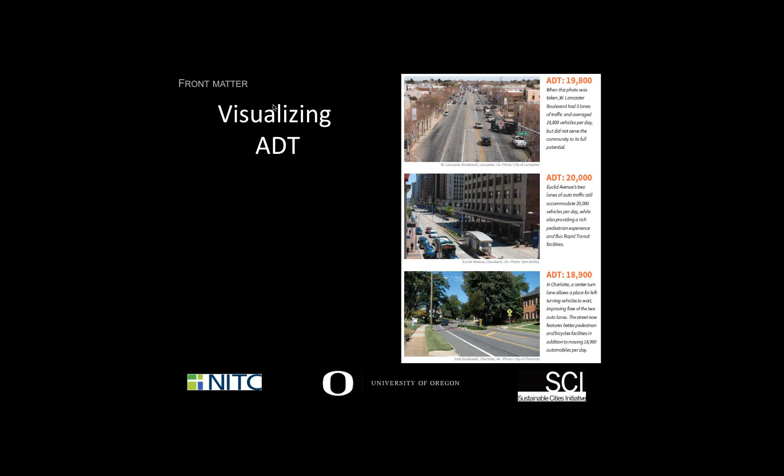So the idea here is you can have an open conversation in the community: here's the level of traffic, here's some different designs that can handle that level of traffic, what looks best? Rather than a fight of yes or no, here's a range of things that might happen—what do we want in our community? What do people think?

We introduce the idea, or highlight the difference between a speed limit versus a design speed—different ways to think about how we get certain behavior from vehicles on our streets. This is information every traffic engineer already knows, because streets are designed to a certain speed limit on purpose.

In fact, they're designed at a certain level, and then we post the streets with a lower speed limit, which is a little bit crazy, honestly, because if we've designed a street for a certain speed for comfort traveling at that speed, our natural tendency as motorists would be to go that speed because that's what it's been designed for. So we introduced this idea of designing a street to get the speed you want, rather than posting a speed limit sign to get it.

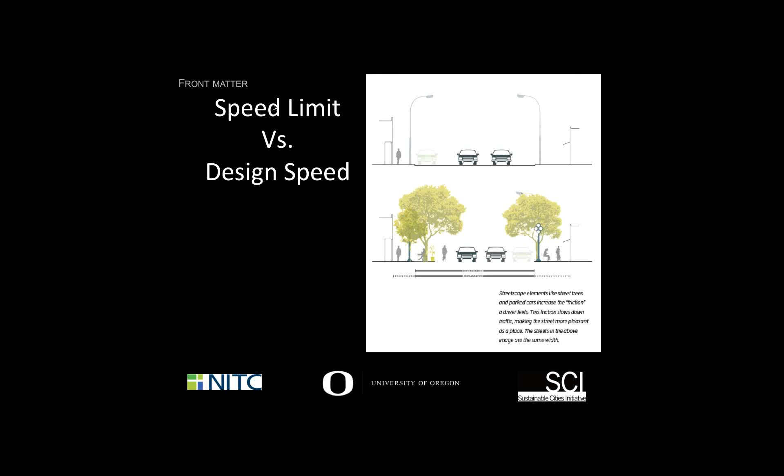And then we show some examples: here's three different streets, all with a 25 mile per hour posted speed, and three different designs. You can begin engaging more people in that conversation—which type of street do you think would actually get the behavior that you want? Rather than community members saying we need a speed limit sign to slow the traffic down, we can have this type of discussion in the communities.

Maybe a speed limit sign isn't really going to slow traffic down that much, because we've designed the street to go twice as fast as what you're asking for. If we really want motorists to drive slower, then maybe it's about how we design our street. So again, it's introducing vocabulary to a wider group of stakeholders so they can engage in these conversations appropriately—concepts that many people across city staff or local businesses might be very unfamiliar with, trying to engage everyone in that conversation in a productive way.

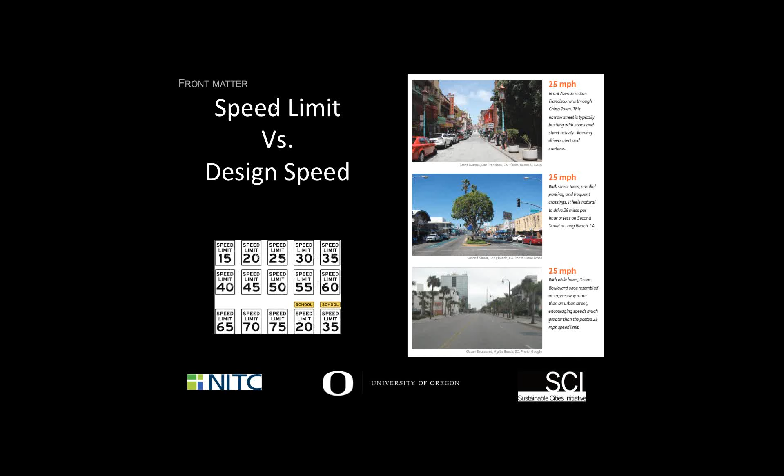We introduced the idea of the street cross-section, the different elements from the streetscape: curbs, parking, right-of-way, and gave a little bit of information about the costs of manipulating that right-of-way and cross-section.

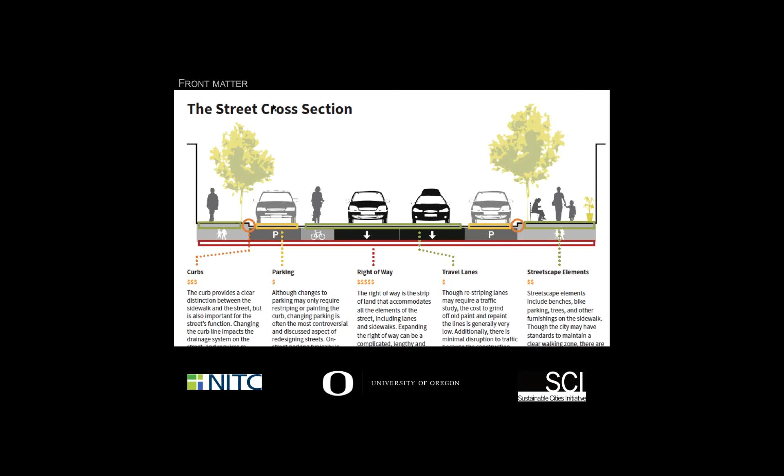Expanding a right-of-way is expensive versus restriping travel lanes, which financially doesn't cost a whole lot at all. Politically, maybe there's a different cost. We try to introduce this to help people have the conversation productively.

Each case study has a whole section with a series of common elements. Each case study is 4 pages, all organized in the same basic way. I'll get into the cases in just a moment. Every case has this engineering bar that you see here on the slide.

The type of street, what the right-of-way is, the length of the project we're talking about, what was the speed limit before the project and after the redesign, what was the average daily traffic before and after the project, and how long the process took.

Every case has that type of information, which is a standard bit of information to get people going. We worked with different traffic engineers to make sure this information would help add some seriousness to their paying attention to the rest of the material.

Each case also has a street cross-section before and after. In all the cases, the right-of-way remained the same, but what were the lane widths and lane allocations? If it went from 4 travel lanes to maybe 2 throughput lanes, a center turn lane, and 2 bike lanes, what were the widths before and after? What did the community have to play with in terms of space, and how did they deal with that?

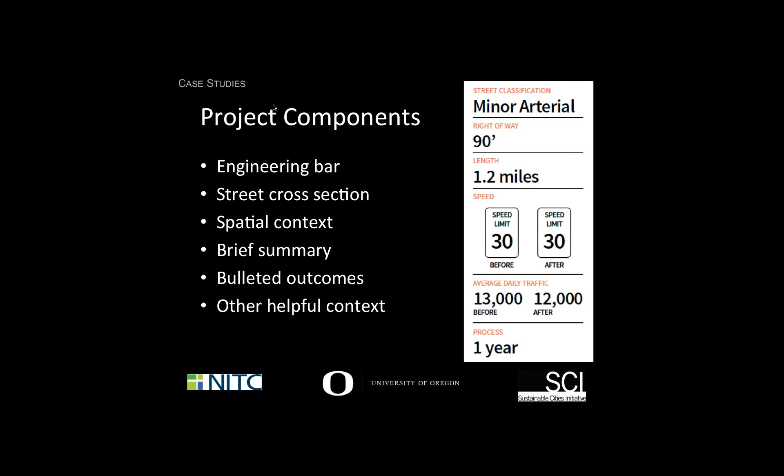That's the basic framing for each case. These next 2 slides lay out what each case study actually looks like - these are the 4 pages.

Every page starts with a before picture in the lower left and an after picture up top, so you can see the precondition and post-condition. There's a summary of the basic project, what happened, what did they do, and then the city, state, and city size is included, as well as the type of street we're dealing with.

So you can get a sense if you're trying to compare like-sized cities. Of course, it's not always a fair comparison - there aren't many cities around the country where the metro population is going to be 12.5 million people.

But when you think about a street like you see here on the screen, it's irrelevant that it's in the middle of a metro area of 12.5 million people, because this is actually a local commercial street to a local area. There are lessons here transferable to many parts of the country that aren't in the 12.5 million person, very sunny metropolitan area of Southern California.

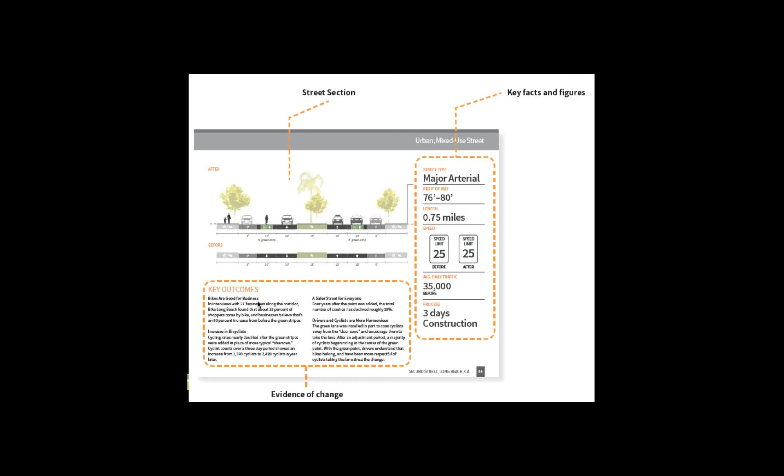The key outcomes, the successes or unintended consequences, are listed here in very short, brief ways to communicate what happened. This is really important for busy people who don't have a lot of time but are important in moving street projects forward in your community.

The third page includes additional context of the street. We do this figure ground mapping to show the building mass, how dense or urban or low density it is - the urban form of the space - which is particularly useful to planners, may not be as easily read by others at first, but it's important for the general context of where the street is.

We try to include a map in every example to show a larger spatial context of where that street is in a greater urban mix, and then provide some really brief bullets to describe that in text form.

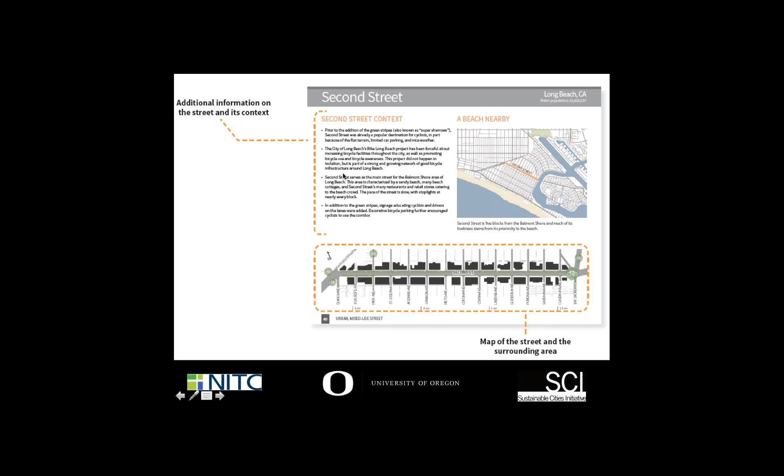And then the fourth page includes additional information that seems useful to understand what the project was, including maybe some statistics or some pictures. Every case here is a little bit different. So that's the basic overview of how things are structured.

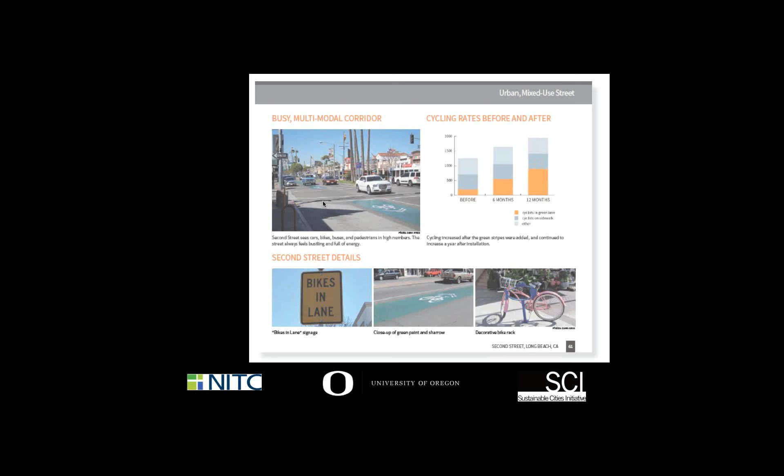Now I will go through a few examples, mostly to give you a sense of how the book and the cases look. There's a variety of streets from all over the country, and the best way to use these cases is actually, I think, to use the book as a whole.

But if you find a better way to use it, let me know - that would be great. Of course, every situation in your community may be a bit different, as I said before, from the examples in this book. You're never going to get an exact one-to-one match.

But we've purposefully chosen a wide range of streets from different sized cities, mostly focusing on commercial activity, to try to make that transfer of knowledge as easy as possible and as relevant as possible.

So again, I can't emphasize this enough: for the most part, the examples in this book are really normal looking projects. They're hardly award-winning or statement-making projects. They are examples of repurposing street space in ways that expand transportation choices in not very radical ways.

I hope, if nothing else, you will get that, because I know even here in progressive, bike-friendly Eugene, Oregon, we are having hard battles on how to rethink our streets. And I can only imagine, and I've heard from many people around the country, that these are very typical, difficult conversations around the country.

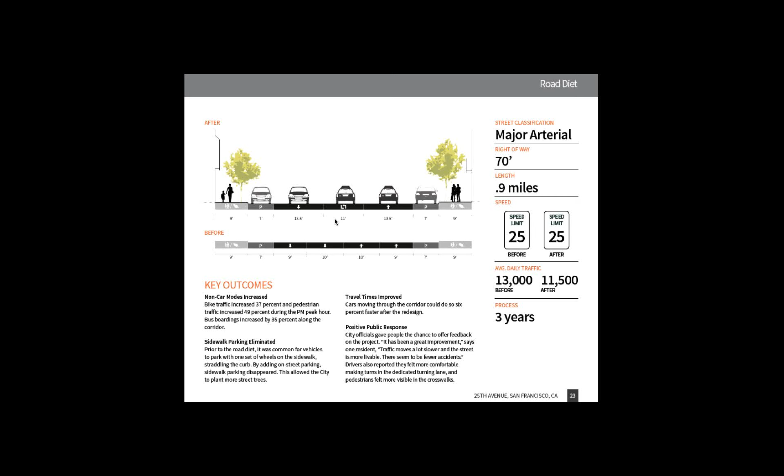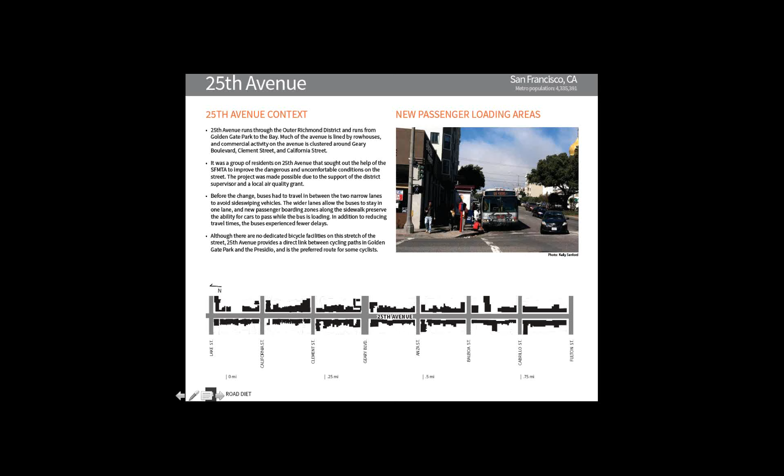So again, this is just to show that there are sections here describing the context, where it is in the city, what type of, why people would be traveling along this route, who lives there, some of the density of the urban space by looking at the bottom, and then an image of how it looks. This is the 4th page in this case, where the European model of parking...

I don't know if there's an official name for that, versus, so that was the before, a very courteous move in some ways if you were parking your vehicle to keep space on the travel lane open for other vehicles and for buses to do that a little bit more comfortably by sacrificing some of the pedestrian realm. And now with the wider lane, this comfortable space for vehicles to park and planting of trees just reinforce the fact that you can't put half of your car on the sidewalk, which improves the pedestrian environment as well.

And then there's just some additional information about things that are nearby. So that's one example, all 4 pages. I don't think in the subsequent examples I'm going to go through all 4 pages, but I'd just like to show you a few of the types of examples that are here.

So here's one that's a little bit more of a signature project, really interesting to me. This is in Lancaster, California, a very suburb type area, fully built in the auto age, Southern California. This was what you would call their main street, which doesn't look very Main Street-ish, but very typical for many streets across the country. These types of streets happen everywhere. 4 travel lanes, a center turn lane. These are commercial areas on the side.